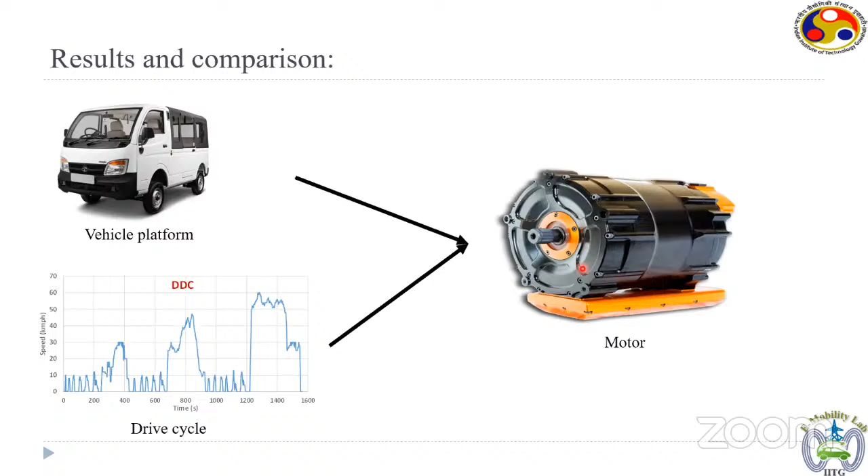Now, the process that we follow today in our group is something like this. First of all, we do a very detailed drive cycle analysis for the given vehicle platform. From there, we try to determine the motor specifications like the torque versus speed curve, the rated values of torque, the peak values of torque, the base speed, the maximum speed, and so on. So we try to determine all the major motor specifications.

Then the next step that we take is to work with the equivalent circuit of the machine. If we are working with induction machine, then we take its equivalent circuit. If we work with, say, PM machines, then we take the corresponding equivalent circuit, and then we try to determine the equivalent circuit parameters which would fulfill this requirement, the torque versus speed requirement.

Okay, so it's an inverse optimization problem. So we try to find each and every equivalent circuit parameter to meet the requirements that we get from step number two.

Now, once we know the equivalent circuit parameters, the next challenge is to find out the motor geometry which satisfies those equivalent circuit parameters. So, for example, if we need a certain value of the inductance, let's say stator leakage inductance, to meet the torque versus speed requirement, then we would try to find out the number of slots in the machine and the dimensions of the slots which will give us that inductance value, because the inductance value is given by the geometry of the slot of the machine.

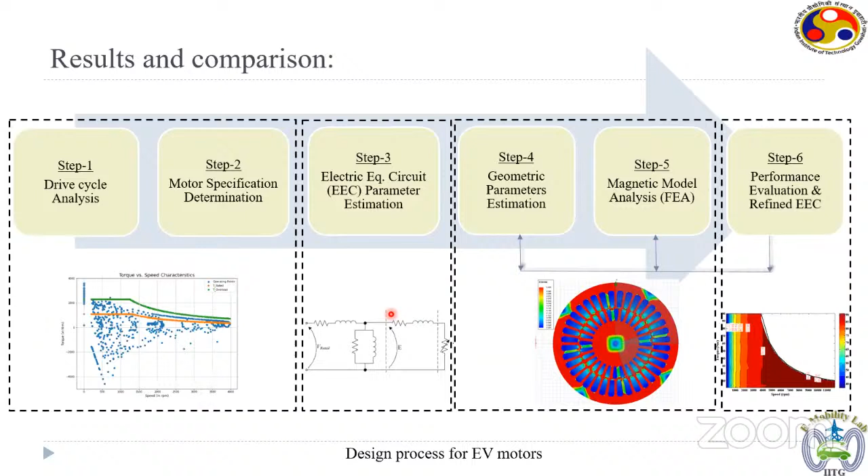So now the question is, can we really reduce the time to design using any kind of AI and machine learning based technique? To come to that, we first need to understand what kind of mathematical models we use in each stage. In the first 3 steps of the machine design, which are the drive cycle analysis, motor specification determination, and the equivalent circuit parameter estimation, we use these 3 types of mathematical models. We use exact physics-based models to define the motion of the vehicle. So that is all Newtonian physics.

Then we use statistical analysis to find out the desired or optimal torque versus speed characteristics of the machine. It's statistical analysis because we want to make sure that the machine is neither predominantly overloaded nor predominantly underloaded. So we need statistical models for that.

And then to find the equivalent circuit parameters which would meet the motor specifications from step number 2, we need optimization. So we use classical optimization techniques like the gradient search method, or whatever deterministic techniques people have proposed. It's a multivariable optimization. There are 6 or 7 unknown parameters, and you have to find the optimal value of those parameters to get the desired torque versus speed characteristics. So these are the 3 types of models that we use in steps 1 to 3.

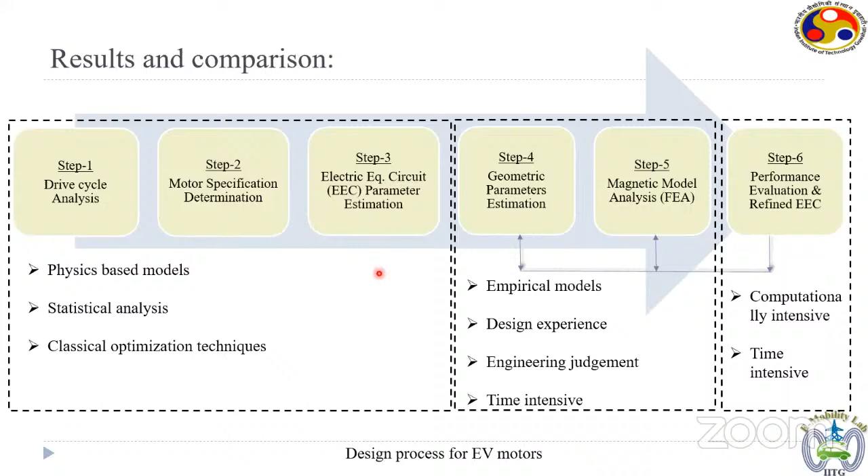So the idea was that if we try to merge the domain expertise, here the domain expertise is machine design, together with the upcoming field of artificial intelligence and machine learning, then that intersection that we get is actually the intelligent design platform. So we are trying to blend the domain expertise of motor design together with the AI and machine learning algorithms, and then create a design platform which would minimize the time to design the machine, which would minimize the use of empirical models, which would minimize the use of engineering judgment, and would also minimize the role of prior experience and expertise while coming to a solution. So that is the big goal and the idea that we have.

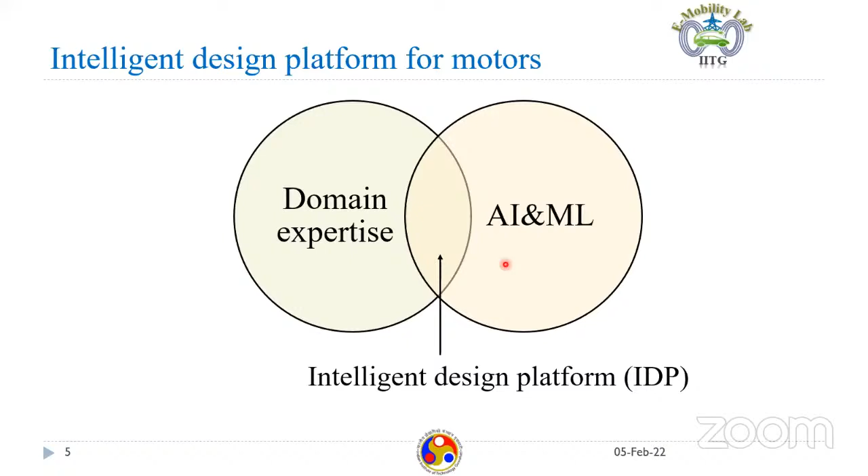I mean, engineering judgment and previous experience is still important, okay, but it's not a key parameter if this kind of intelligent platform is made properly, because the previous historical judgment and the historical experience is actually captured by the AI algorithms. So it's there in the form of the algorithms, and it is accessible to the young generation of design engineers and across the generations. And moreover, it can also become self-learning. So the more it is used, the more enriched it becomes with time. So it's also the self-learning aspect which makes AI a very important and very attractive proposition.

Now, to understand how we try to use it, let's take an example.

Yeah, I think somebody wanted to say something in between. I heard some question. Sir, I think Harishankar sir accidentally unmuted himself. Oh, okay, fine. Okay, then.

Yeah, let's carry on. So let's take an example, and the example that we are going to take is here. So there is a situation where we need a motor which produces a maximum power of 21 kilowatt at wheel. So that's the power requirement at wheel, and the maximum torque required at the wheel is 41 kilonewton meter, and the maximum speed of the wheel is 2080 rpm. So this was the requirement at the wheel.

Now the other requirement that we have is the ratio of the maximum speed to base speed for the motor. So this point is up to where the torque remains constant. If you see this orange curve or even the green curve, the speed up to which the torque remains constant is known as the base speed, and the maximum speed of the machine is where it produces some amount of torque. Beyond that the machine can't operate. So the ratio of the maximum speed to base speed is taken to be 3.

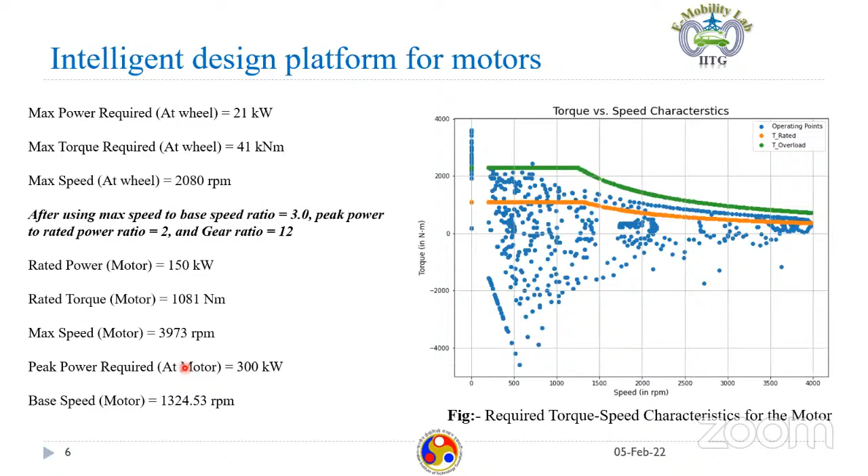Now the question comes: what should be the design of the machine which would give us these numbers? When I say design of the machine, it means how many poles, how many slots on the stator, how many slots on the rotor, what is the diameter of the stator, what is the diameter of the shaft, what is the length of the machine, what is the air gap. So every detail we need, so that the design of the machine satisfies these 5 parameters, these 5 numbers. Now, to do that, we go through our AI based design approach.

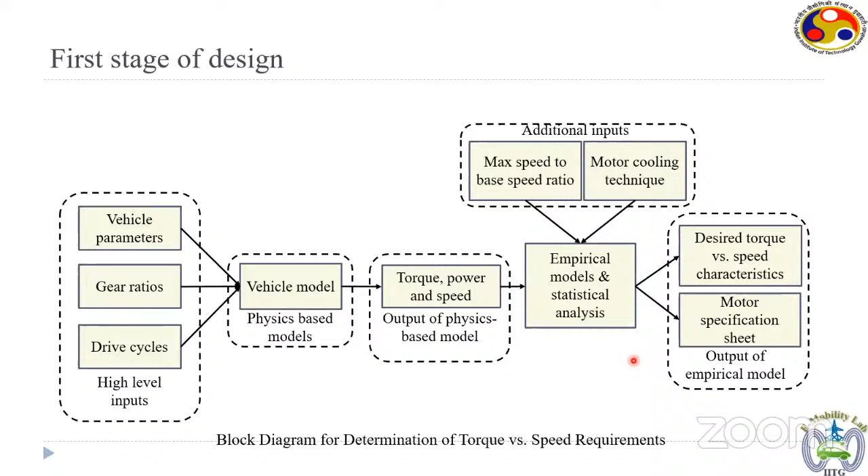Okay, so to do the AI based design approach, we need up to this point the torque, power, and speed characteristics, which we already have, by the way. So all this analysis is done, and we have all the 5 parameters which would be needed. And once we have those critical 5 parameters, we come to the AI domain. So we have the desired torque versus speed characteristics. Those 5 parameters give us the entire torque versus speed characteristics, and we have the motor specifications: the rated value, the peak value. Now these inputs go to the first artificial neural network. ANN is the short form for artificial neural network.

Now the output of this first artificial neural network are the major motor design parameters, like the length, the diameter, the number of slots, the number of poles, and so on and so forth. So the major parameters of the machine. Now, the parameters that come out of the artificial neural network go through a parameter consistency check or sanity check, because it's possible that the ANN gives us that the machine should have 5 poles.

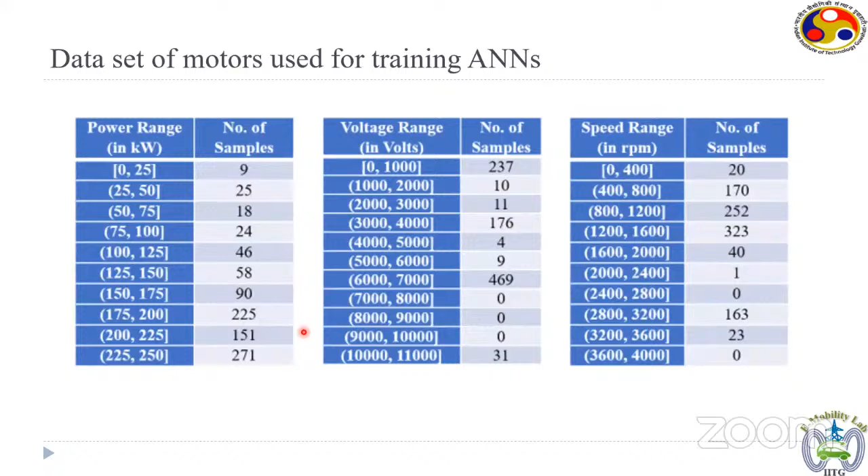Okay, in our design, in these designs, this is already taken care of, because the people who designed the motors, they did pay attention to that. But still, something might go wrong when we get the results. So to be sure, we put these kinds of checks.

Okay, so this is the first level of checks that are put, and all the outputs need to pass through these checks. It's an illustrative example that I have given here. The library of checks is rather larger, much larger than what we have here.

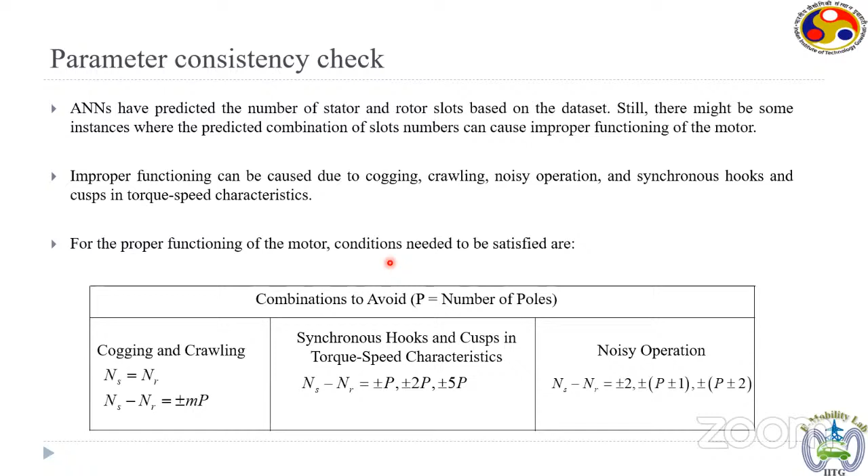Now, you see, after going through the consistency check, so these are the major output parameters. So we gave these input parameters from the initial analysis, which I showed 6 slides back. And these are the 10 outputs that we have: the stack length, the number of poles, the number of stator slots, the number of rotor slots, and so on.

And also the slot type. So slot type represents what kind of a slot geometry are we looking at. And then what are the flux densities in the key parts of the machine. Okay, so we got all the key parameters. Now, we take these key parameters and pass on to the second neural network.

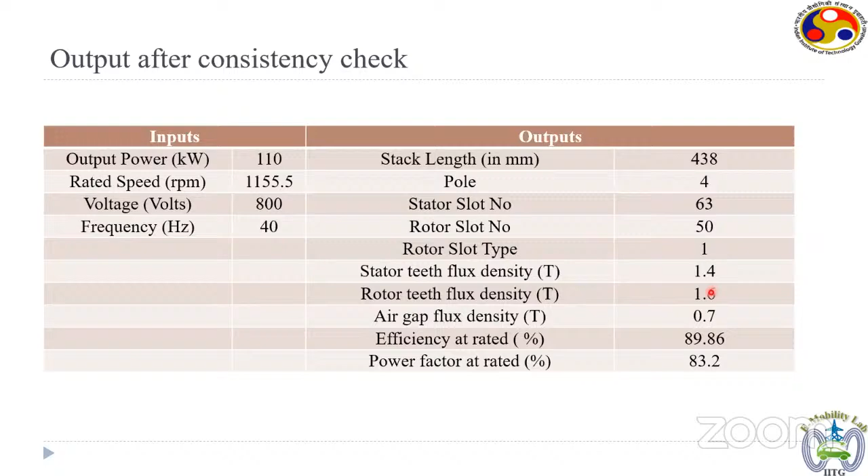Now, this second neural network is also trained using the big data set which I showed you earlier. Okay. Now, the job of this second neural network is to take these parameters, okay, and give us the detailed stator design. Now, to do that, the entire neural network was trained.

And if you see here, this neural network is much more complex than the neural network one. It has 3 hidden layers. I didn't write all the 10, but it accepts 6 inputs and gives us 9 outputs. And the outputs that this neural network gives are very, very detailed designs of the stator lamination.

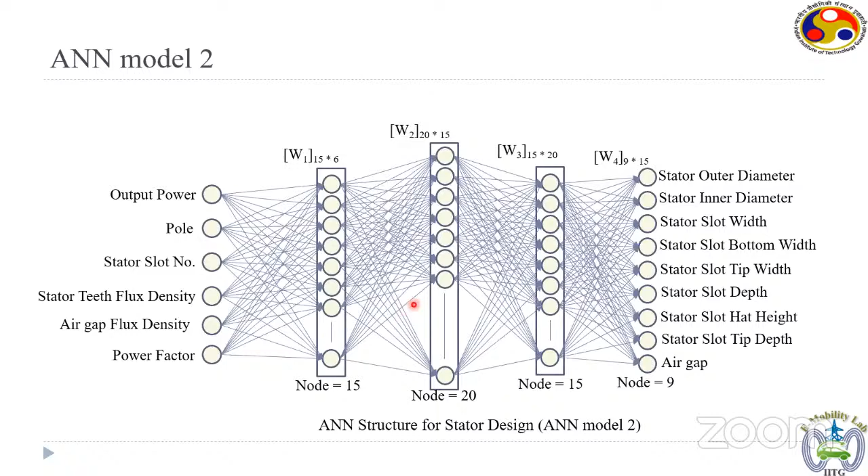Now, training this neural network again took a lot of time because it's a very complex one. The algorithms take huge time to execute and run. Okay, so again, it's a matter of many weeks to train properly this neural network. And once it was trained, then it gave all the detailed parameters of the stator lamination design.

We gave the major input parameters and we got the detailed design, like the illustration is given here. So what is the width of the slot, what is the depth of the slot, and so on and so forth.

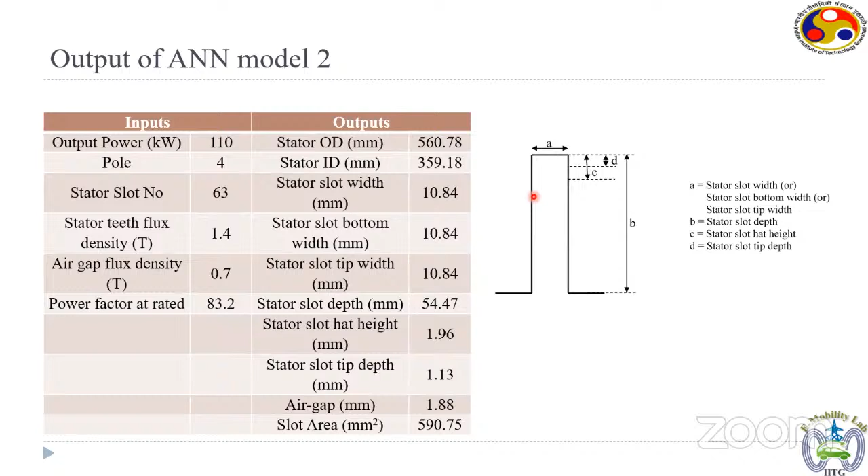Now, as I told you earlier, the output given by this neural network might not be acceptable to the design team. The design team might like to go for different kinds of a slot, and we should give that discretion to the design team. So we come to the slot translation part.

So this was the kind of slot geometry on top that the neural network gave, but we don't want to accept it. We want to take some other slot geometry. So one can choose any one of these slots here. These are just some samples that I have given, but we actually have a library of around 80 plus slots. So now to translate this slot into any one of the 80 types of slots that are feasible, we again need to follow some rules.

So the first rule that we need to follow is that the slot area should not change. If the neural network model gave a slot with a certain slot area, then if you want to choose any other slot, the area of that new slot should be exactly the same as this slot. There can be a small variation, maybe 1% or under 1% variation, because when we do the geometry translation, it is not always possible to have exactly the same slot area. A small deviation is allowed, but it should not be more than 1%.

Clear? Then also we need to make sure that once we translate this specific geometry into any other geometry, the leakage inductance of the slots should not change, because if the leakage inductance changes, then we are changing the entire behavior of the machine. So these are some of the rules that we need to follow when we do the slot translation. Keeping those rules in mind, the algorithm can do any kind of slot translation, and one can choose any other shape of the slot, and one need not accept the slot shapes given by the neural network. Now, once that is done, we come to the rotor part.

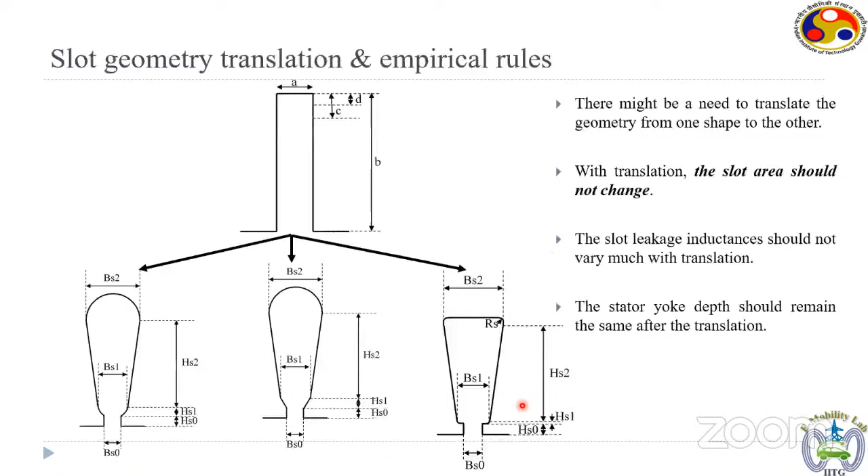We have the detailed lamination design of the stator. So we now need to know the lamination design of the rotor. Let me go back a few slides. If you recall, this was the output of the ANN1, which gave us the major motor parameters, and the major motor parameters were these here.

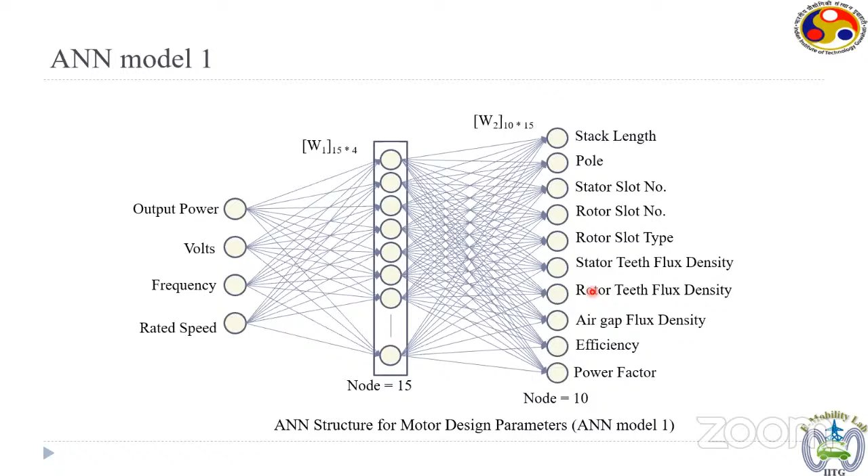So we take this set of parameters and we feed it to the neural network 3, and the output of the neural network 3 would be the rotor lamination design. Depending on the speed of the machine, the output power of the machine, and so on, we get a detailed rotor lamination design. Now that rotor lamination design again has to go through a consistency check.

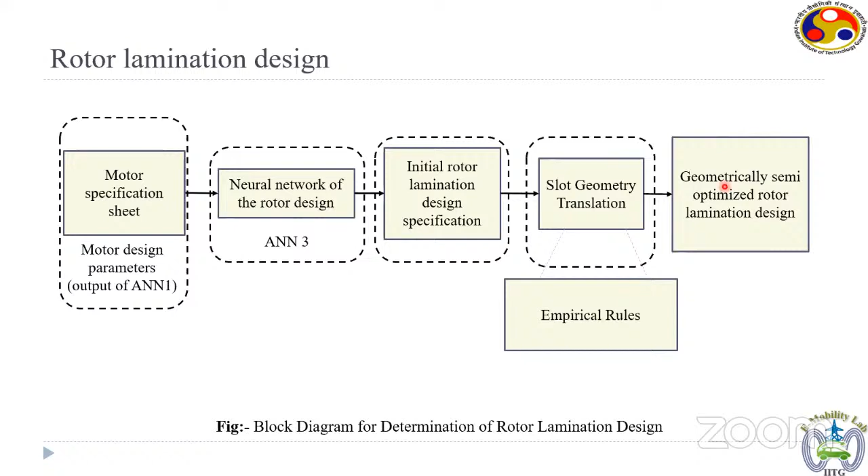And also the user might accept the slot shapes that the neural network gave, or may decide to use some other slot shape, just like in the case of the stator. So that is allowed. And once the design team is satisfied, then we get the semi-optimized design of the rotor. Now, to understand that, here is the neural network 3 that we have.

This neural network 3, which gives us the detailed rotor design, has one hidden layer of 20 nodes. It accepts 7 inputs and gives 13 outputs, and these 13 outputs define the entire detailed geometry of the rotor slot shape. Now, you would appreciate that all the 3 neural networks have a very different structure. They have a different level of complexity, and that is because each problem is a unique one.

From high-level input to the major motor specifications is one problem with a complexity. Motor specification to detailed stator lamination design is another problem with another level of complexity. Motor specification to rotor lamination design is a third problem with a different complexity. But all these 3 neural networks are trained using the same data set which I showed you earlier. The data set remains consistent, and all the 3 neural networks are trained using that input data set.

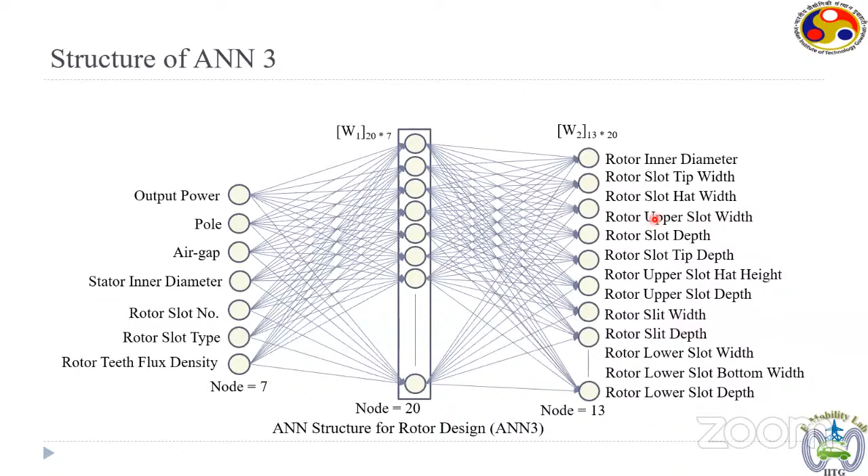Now, having said that, let's look at the output of the neural network 3 for our test example. So this is what the neural network gave for the rotor lamination, and it gave all the details of the slot geometry.

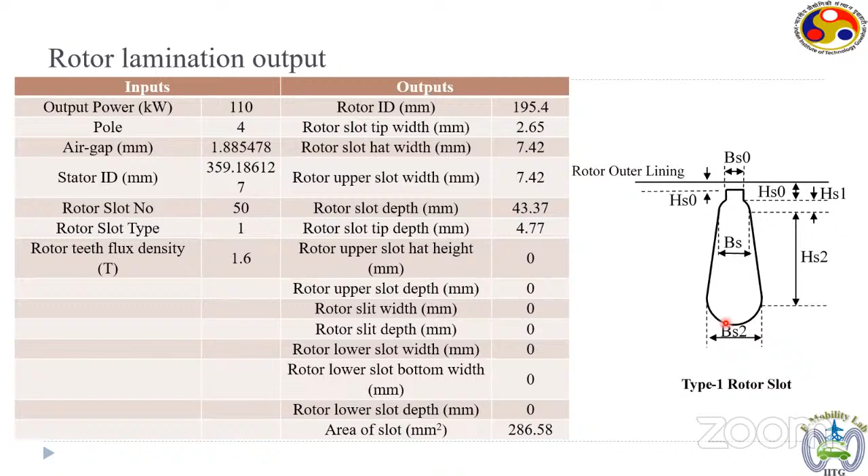Okay, now again, the design team can accept this slot geometry, or can decide to go for some other slot geometry. Now we have a library of around 30 or 35 rotor slot geometries. So one can translate any geometry into any other geometry. And while we do the translation, we again need to keep the important points in mind, that the slot area should not change and the leakage inductance of the slot should not change. Because if the area or the leakage inductance changes, then we are changing the entire behavior or the property of the machine. Okay, so that we should try to avoid.

And once we have chosen this slot and all fine tuning is done, then actually we have the complete design of the machine. Now, if I exclude the time to train the neural network and look at this entire design process, then from the point of giving the high level specifications to getting the final design of the machine with all the details of the stator slots and rotor slots and so on, takes 5 minutes, not more than 5 minutes. If we would not have used it, then it would have been a process which would have taken months. Okay, so this is the amount of reduction in time that we can get.

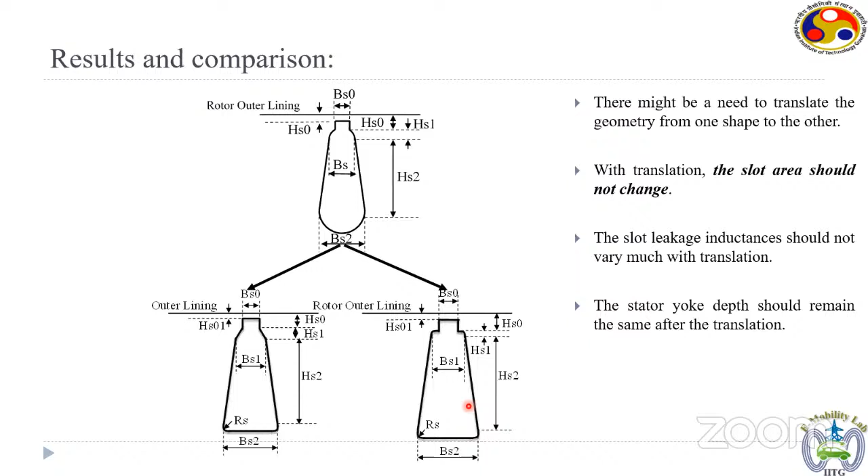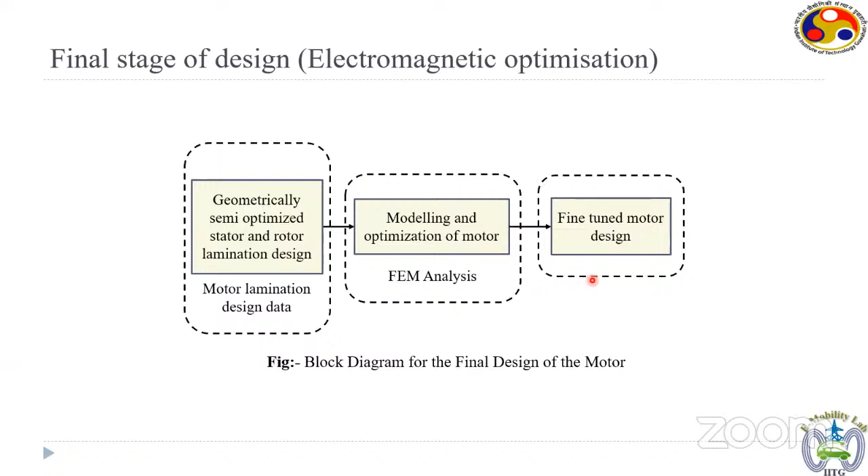Now, once we have the final geometry of the machine, we did the detailed finite element analysis. Okay, and did some kind of fine tuning if it's necessary, and got the final design. And this is how the final design of the machine eventually looked like.

Now, one thing I have to emphasize is that the quality of the results that you get from the machine learning algorithm, the neural networks fall in the category of machine learning, depends on the quality of data that you have used to train it. Okay, so if you have used a bad set of data to train the neural networks, then you can't expect beautiful designs. Okay, but if you have used a very high quality data to train your neural network, then you would get very good initial designs.

Okay, so we can imagine that this neural network, or this entire machine learning and AI in general, is a very bright student, a very bright kid. If you teach it wrong things, it would do wrong. If you teach it great things, it would do wonderful work. Okay, so everything depends on the type and the quality of data that we are going to use. But yes, once trained on a high quality data, the subsequent job of designing becomes extremely easy. So you can reduce the time taken to come to a design from months to actually a couple of days. So that's the order of reduction in time that one can expect.

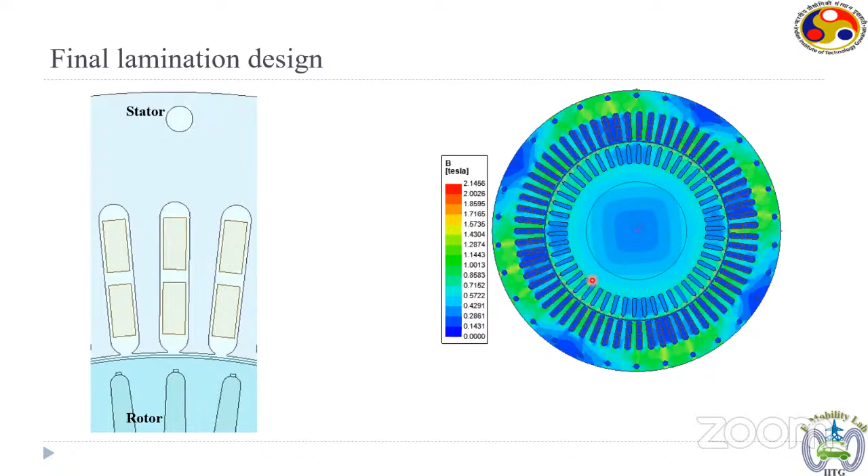So this was actually the last slide that I wanted to discuss with you. So eventually we will have a complete design platform, which will start with the very high level problem statement, would do an automated drive cycle analysis, would extract the critical parameters of the machine, would use the three neural network models. All that will be integrated onto a single platform. And we are trying to put everything on, not Java, sorry, Python. So we are programming everything in Python.

And then at the end, we would have the motor design. So from this high level problem statement to the final motor design would be one seamless platform, and all the intermediate steps, all four of them, would be encapsulated in a machine learning and AI paradigm. So that is what we are developing, and hopefully in near future we will have our own design platform. So I think with this I will end my talk and would open the platform for Q&A.

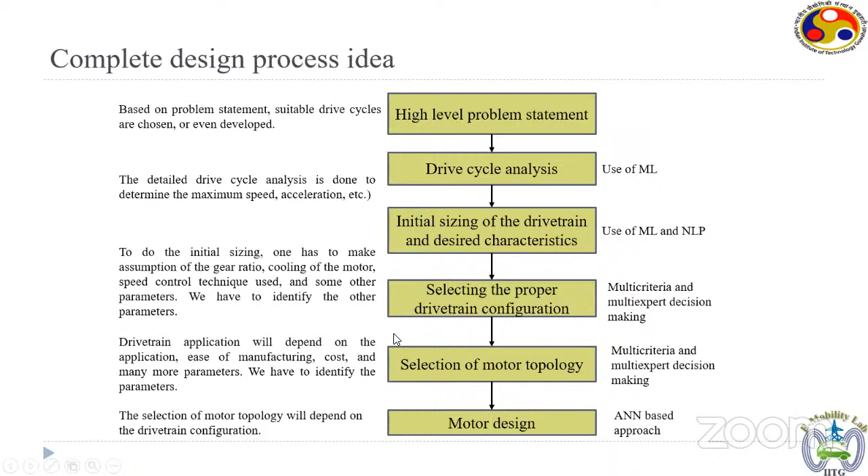So I hope I could make some sense. And yeah, it's a big topic, but I guess people might have appreciated the initial idea.

Yeah, Dr. Praveen Kumar, it is a really excellent, eye-opening, very good presentation. And I really appreciate the way you have explained it, even a layman can understand it very easily. I really appreciate that. Thank you very much. I just have one question to ask.

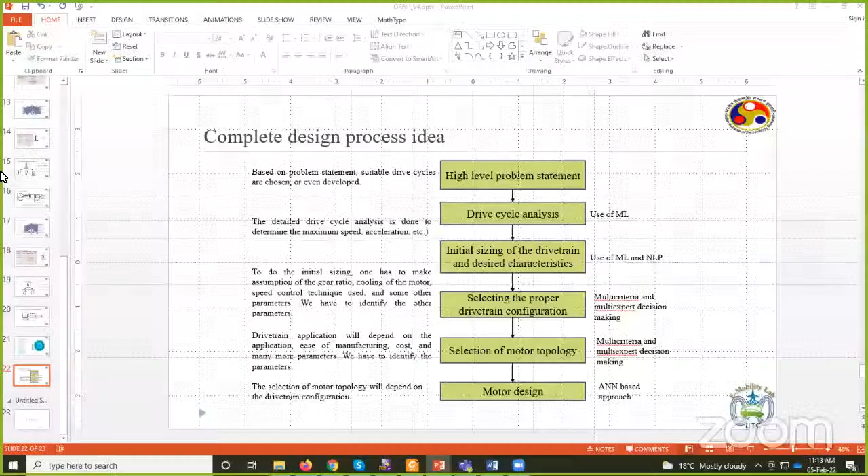I think in one of your slides where you have taken the inputs, maybe if you can just show that slide. Just a second. From the different machines, if you can just show that. I just wanted to understand, I think probably by the end of the time. Yeah, this one. So I think the machine must be of the same type, right?

Suppose I don't know what kind of a machine I need to design, whether it should be PMSM or... Oh, yeah. This neural network was trained for induction machines. Okay. Yeah, that's good actually. But suppose somebody wants to know which kind of technology he wants to choose. One way is that he can try all different machines in one learning and take an output. I don't know.

No, for that, that's also a question that we are trying to address using AI and ML. For a given problem statement, we can use an induction machine, a permanent magnet machine, a synchronous reluctance machine, axial flux, radial flux. Now the question comes, which one should one be choosing? That is a problem which needs judgmental models, because you have to judge various kinds of technologies.

For that, we are planning to use AI. We have not yet tried for the motors so far, but we think we will have to go for something known as natural language processing. The idea is that there is a lot of literature available from different experts who have given their opinion. We have to collate all that literature and train a natural language processing based algorithm, and then that algorithm would interact with the designer.

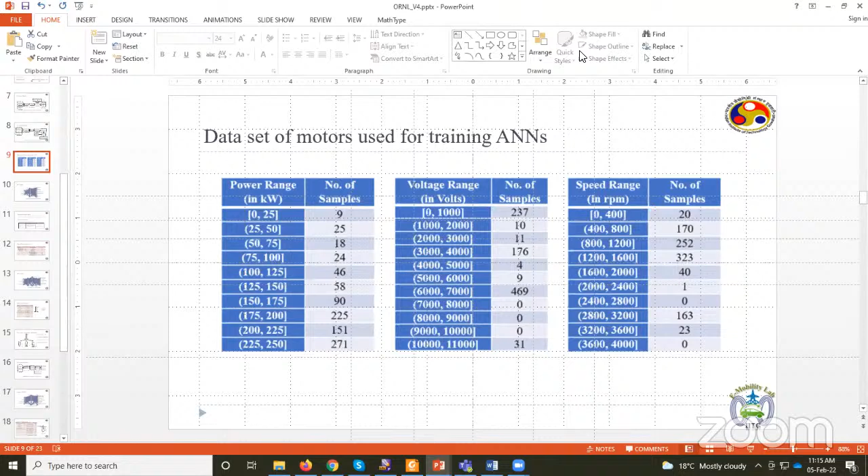Okay. Thank you for the answer. So I hope I could answer your question, Mr. Vijay. I think you answered me completely. Thank you very much. You understood my question and you answered it. Thank you very much. So, any other questions from the audience?

Yes, sir. We have one more question in the chat box. Is the question visible to you? Yeah. Sir, does this method suggest the type of motor? No, so far no, because this was trained for induction machines. I think this was the question Mr. Vijay asked, and I explained. That's a different level of AI algorithms that we would have to use.

Okay. So, are there any other questions? I think I have one more question.

Yes. I want to know, as of now globally, which companies are using it, how much it is being used, and who are the leaders in this? Oh, that is a very tightly held secret. I don't know who is using it or how many companies are using it, but what I know is that this is now becoming a new paradigm shift in design of systems.

We are looking at just motors, but it can be extended to batteries, to inverters, to many areas, to the entire drivetrain even. Yeah, complete drivetrain. Yes, correct. I think it's an excellent concept. Yeah, it just needs a lot of time and patience, that's all. Yes.